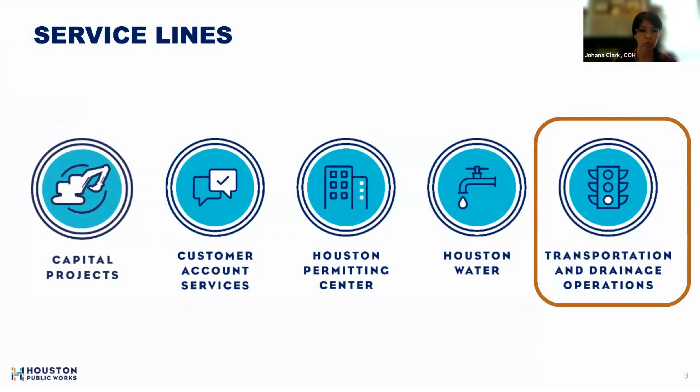Please place your questions in the chat. We are part of a stormwater operations branch. Our team is tasked with delivering drainage rehabilitation programs for the city. We also review all the engineering and design plans that go through the city for CIP, any type of feedback that our Office of City Engineers requires for encroachments or any type of private development impacting drainage infrastructure.

We also have a very good GIS and asset management team that is tasked with keeping our drainage assets properly tracked and mapped. And we also plan for the future drainage in the city of Houston and coordinate with our capital projects team to make those happen. Our largest group is maintenance—we maintain and operate the existing massive drainage infrastructure in the city.

So with that, our local drainage program is one of the programs we have to rehabilitate the infrastructure that we have today in the city. We deliver rehabilitation, but also very comprehensive street and drainage projects for various neighborhoods throughout the city. This is where we started looking at green infrastructure. So let's talk about the why.

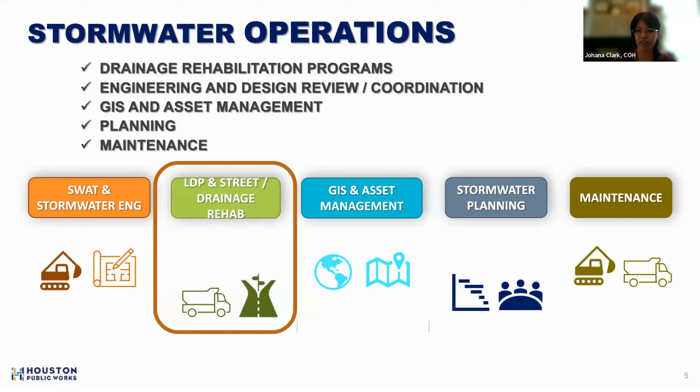Many cities are already ahead of Houston for various reasons. They have been investing in green infrastructure as part of integrated management solutions for stormwater, not only to help with stormwater quality, but to also help with stormwater runoff mitigation.

The green approach can give us a lot of environmental and social benefits too, that through traditional gray infrastructure methods we cannot achieve. So overall, the performance of green infrastructure allows us to reduce pollutant discharge into receiving waterways. We remove a lot of air and water pollutants, and also control stormwater runoff, which helps our flood mitigation strategy. And all of this is why we're looking at it.

This is perfectly aligned with what Resilient Houston is about. I hope all of you are familiar with the plan that was released back in 2020 by Mayor Turner. It's a framework to transform our city to be sure that it's sustainable and resilient, and approaches such as green infrastructure are key and very critical to achieve these goals.

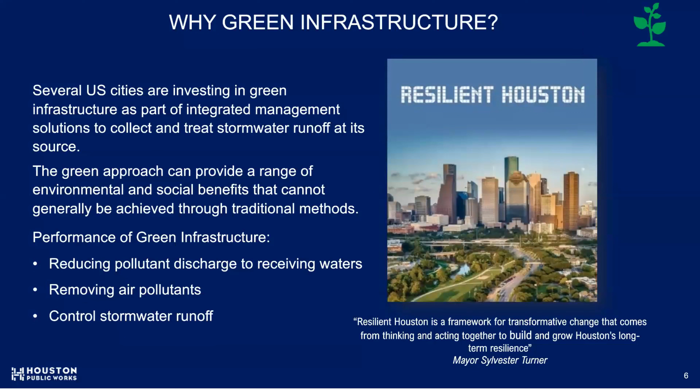Going back to Resilient Houston, this framework has 18 main goals that need to be achieved if we want to get to the 2050 carbon neutral objective laid out by this plan. One of them, goal 11, is to complete 100 new green infrastructure projects by 2025. So that's why Houston Public Works has taken the lead on piloting a set of projects as part of our rehabilitation efforts throughout the city.

So we will have green infrastructure incorporated in many CIPs moving forward. However, we wanted to go ahead of the game and start implementing them and learning what green infrastructure techniques are suitable for the city, which ones will be built right away and maintained mainly by Public Works or any other department, which ones are suitable for us to take over, and of course, efficiency. So that's the goal of this presentation - we want to share with you some of those initiatives.

As benefits of green infrastructure, we can list these primary ones: we can manage stormwater runoff, we can provide retention - we can hold on to this stormwater for some time before it gets rapidly released into our waterways or standard drainage methods, as we do when we don't have this type of application. We reduce street ponding, we can minimize the construction footprint typically seen in our projects, and we can promote groundwater recharge, and contaminant removal is a big thing.

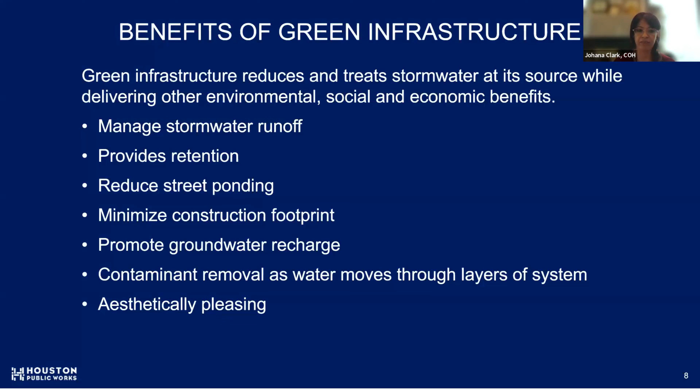We do have challenges - again, those are the reasons why we started with these piloting projects that we're going to share with you today. We are seeing obviously higher costs than traditional infrastructure, mainly because we are not yet seeing a massive deployment of these applications in Houston. We hope that's going to change in the next few years.

We have seen limited flexibility to make field changes, longer lead times due to limited suppliers - again, all of this related to the pilot projects we've been working on in the last few months - and also limited certified installers within the city. Most applications require recurring maintenance, like some of our traditional methods, but the maintenance for green infrastructure is very different from what we have today related to inspection, cleaning of storm sewer pipes, or maintaining roadside ditches, detention ponds, and stormwater pump stations. Green infrastructure is very different and requires us to train our maintenance teams.

And we don't necessarily have performance and maintenance data collected directly by the city. We know that many entities like Harris County, HGAC, and others have collected a lot of data and published very good guidelines, but we wanted to be sure that as part of the City of Houston, specifically Public Works, we are doing our diligence and collecting our own data to see the effectiveness and how suitable those practices are.

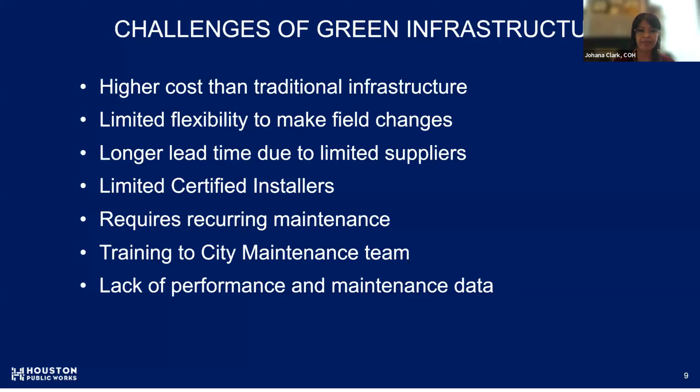So with that, I want to pass this on to Lagnesh Varshney, who will be sharing with you the specific applications we chose for our pilot projects and how we conducted, performed, and evaluated these applications.

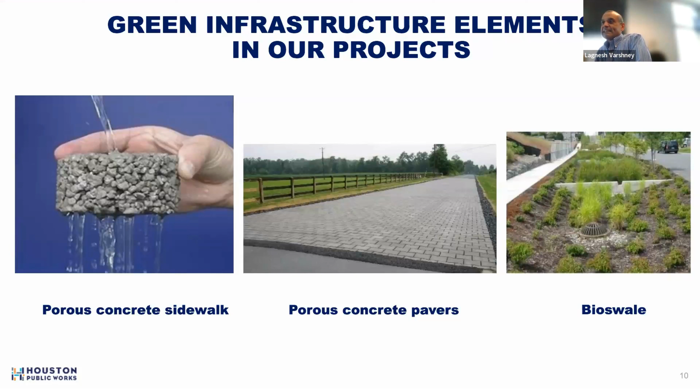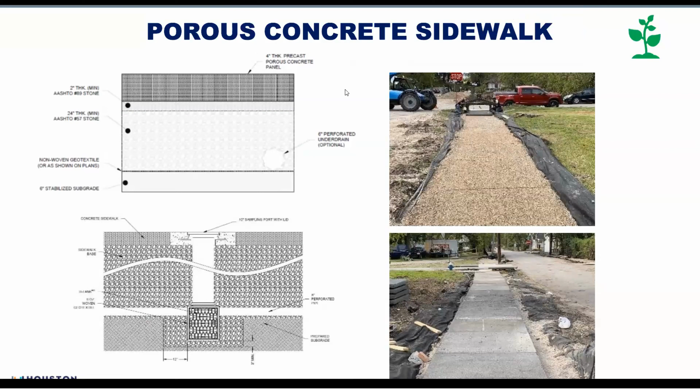This is the porous concrete sidewalk, which has almost 2 feet of filter media under the sidewalk. Then there is a small 6-inch perforated pipe, which collects all the stormwater and ultimately drains to the system - either an open ditch system or a closed system. Another one is the sampling port, and I'll tell more about that, which we are doing on every project so that samples can be collected for stormwater quality.

On the right side is the Malone Park sidewalk. You can see how we were working on the preparation - all those loose gravel, filter media - and then finally we put the panel on top of it.

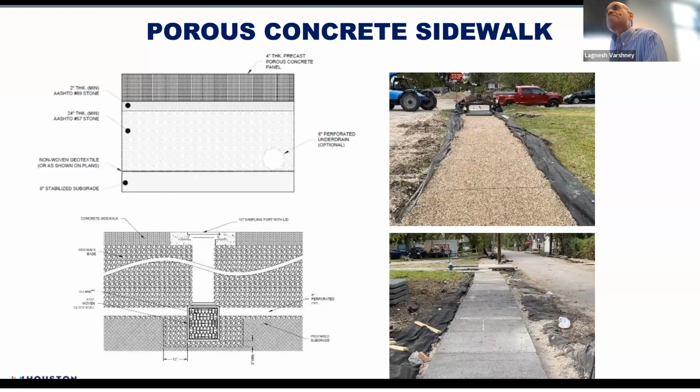These are the porous pavers, which we did on the Winter Street project. Why did we choose porous paver in this location? Because this is a less traffic area - it has only one driveway access to the property next to the railroad. We did this project last year, started and finished in May, and I'm going to show you some of the performance in our next slide.

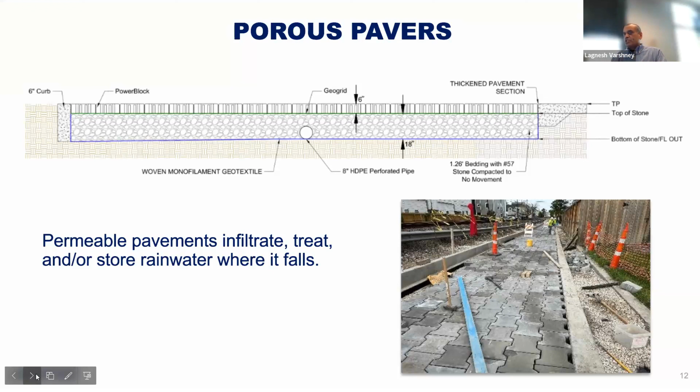Again, it's the same thing - blocks, interblocks. Then there's a filter media at the bottom, 2 feet, and then there's an 8-inch perforated pipe in the middle, which can collect all the water and ultimately drains to the closed system, the open system, or the ditch system.

BioSwale is our 3rd item, which we will be using on the Windsor Park project, where we are making a connection between Windsor Park and Mayor Sylvester Turner Park in Acres Homes, where we will use some of the porous sidewalk and BioSwale. This is the 3rd item, which we haven't started yet, but we have released for construction. I can share more detail once we finish that project for BioSwale.

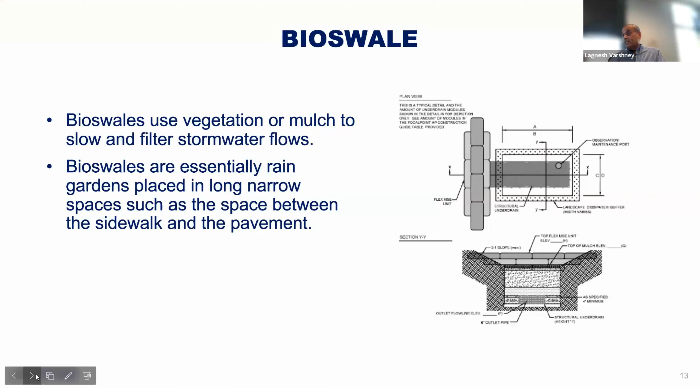So cost comparison - as Johana mentioned, it's quite pricey. When we started, we ended up paying more because, first of all, limited supplier, limited delivery, not much competition, small quantities, so we ended up paying a little more to begin with for the sidewalk. Then we had a second project, Winter Street project, when we had a sidewalk and porous pavers - we negotiated almost 30 to 40% down.

And then our 3rd project, Windsor Park, where we have almost $1 million of concrete porous sidewalk, we negotiated even more. So as we deliver more projects and our demands increase, we are going to get better negotiated costs from these suppliers. And when they find out that the city is looking for those options, more suppliers and installers will come in, and we will have better competition.

As Johana mentioned in her presentation, by 2025 the city is committed to deliver 100 green infrastructure projects, and these are the first 3 from Houston Public Works. I know there are other entities also involved. When they see there's a lot of demand, we will have better competition and better price comparison. The benefits from these green infrastructure elements we will be quantifying in the future, maybe after 2 years, and then we can do some cost-benefit analysis on what kind of benefits we are getting after investing so much money in completing these projects.

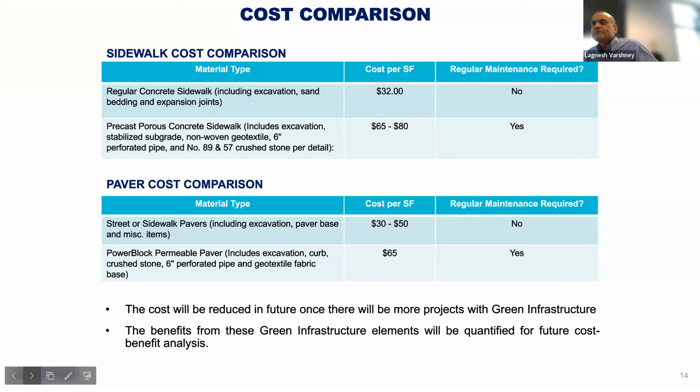As I mentioned, we have Malone Park and Winter Street completed. Malone Park has a porous sidewalk all around the park. Winter Street has a sidewalk and porous pavers. If you look at the volume of detention - in Malone Park we have almost 100,000 gallons of water, which someone suggested we compare with a Starbucks coffee cup: 816,000 coffee cups, or 1 million 12-ounce Coke cans. Same with Winter Street - look at the volume we will have after any rain event.

I would rather have water in those voids rather than going to the property or creating some gutter ponding or some kind of drainage issue, not flooding exactly. So these green infrastructure elements are providing temporary storage of stormwater.

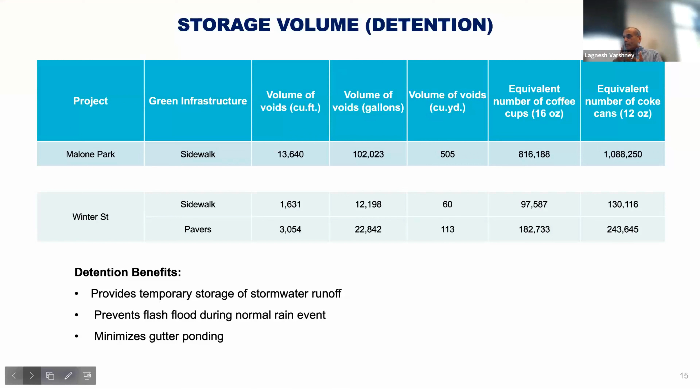It can prevent flash flooding if there's a normal rain event, and of course it minimizes gutter ponding. The way I look at it, with this volume we're not needing any detention pond, and we all know the cost of a detention pond: maintenance, getting the land, all those features attached to it. It's quite pricey. That's what we'll be doing, a cost benefit analysis after a couple of years once we have more data and information regarding its performance.

Next slide please. So as I mentioned, these are the projects with green infrastructure. Next slide please, Malone Park.

This is the location right near University of Houston, almost $1.5 million. These red lines show we have sidewalk on both sides, and we did improve the streets because this was covered under street and drainage rehab. The project was done. We have this green infrastructure sign specially made for us, and we came up with new signs from our maintenance facility which we'll have at these locations talking about green infrastructure. So this project is complete.

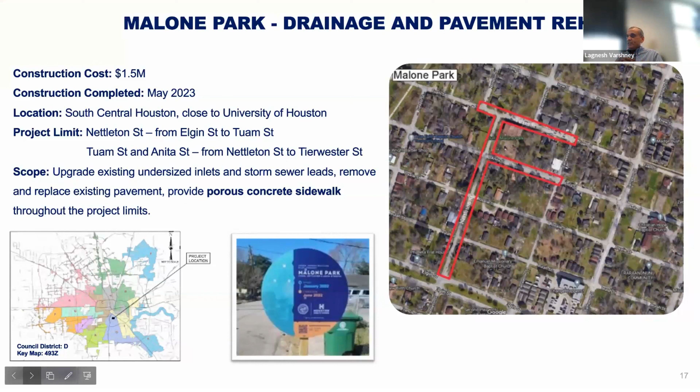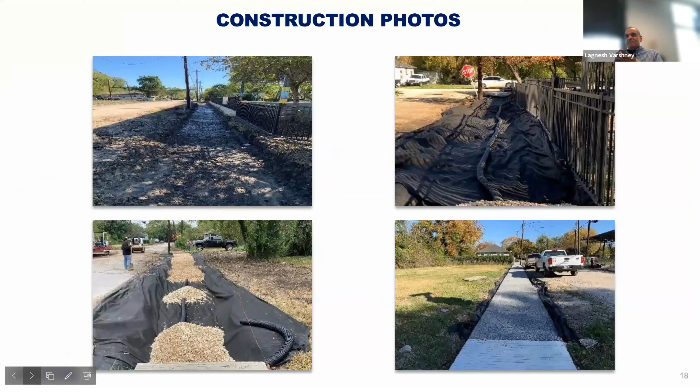These are some construction photos. I just want to share how it was, how it is. These are before and after, how it was, how it is now. You can see the sidewalk on both sides, brand new sidewalk.

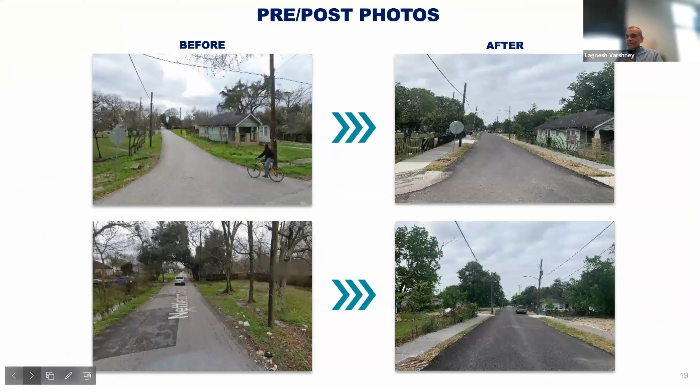Next slide please. This is Winter Street, where we had Winter Street and Hickory. On Winter, we put porous paver. On Hickory, we put porous sidewalk on both sides, and our sidewalk goes through the driveways because these are traffic rated, so people can drive and park their car in their garages. That project is also complete as of May.

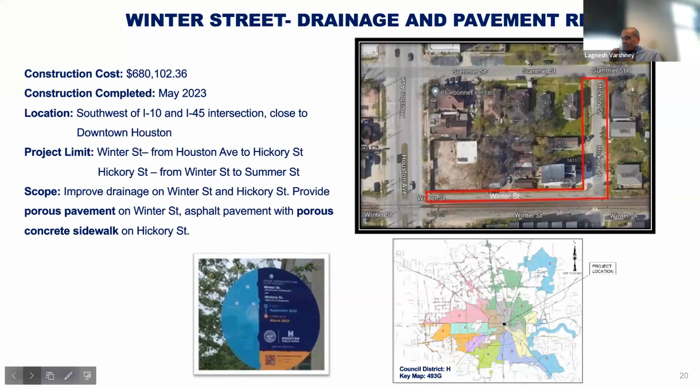Next slide, I'm going to show you how these porous pavers are working. These are some of the during-construction photos, how we were doing it, and you can see the 8-inch perforated pipe on the top left, the person working on it. These are some of the panels, very heavy panels. It's very difficult to make field changes on those panels, so we have to be exact in measuring those.

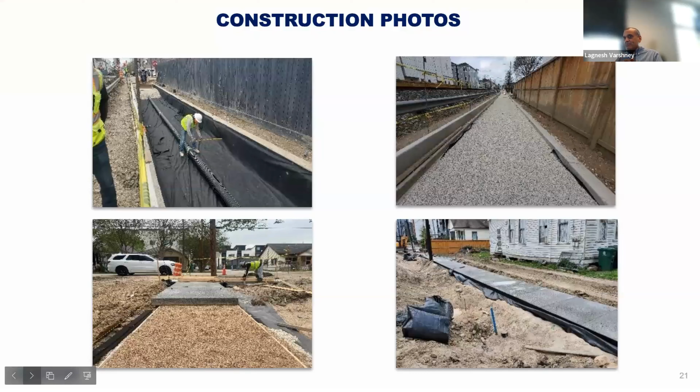Next slide please. These are some before and after. Look how good, as we mentioned, aesthetically pleasing. The porous paver after looks very nice, very close to downtown. Please go by and check it out.

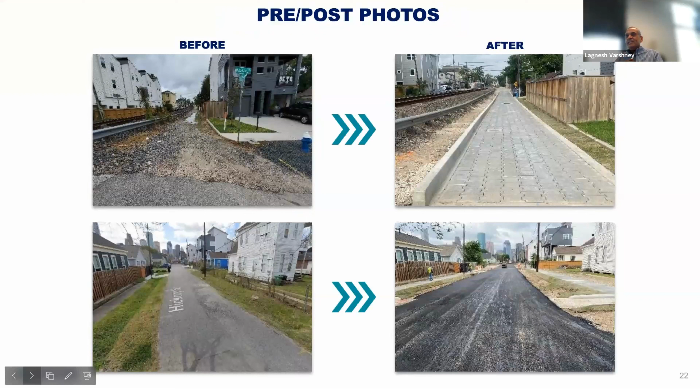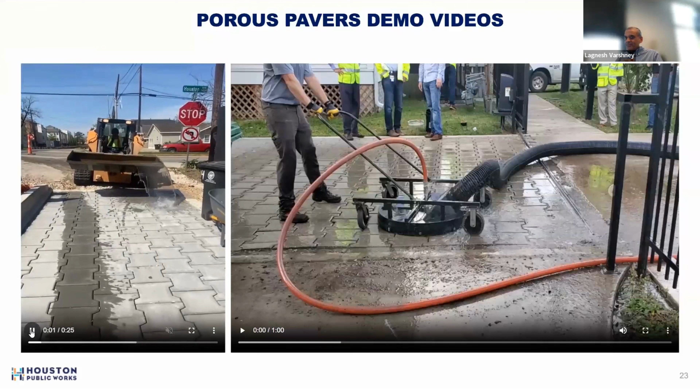Okay, would you please play the video and see how the water goes? You need to start from zero, back it up. Now you guys can see we are pouring water during construction, and the water is gone. It's going all to the storage, to the 2-foot filter media.

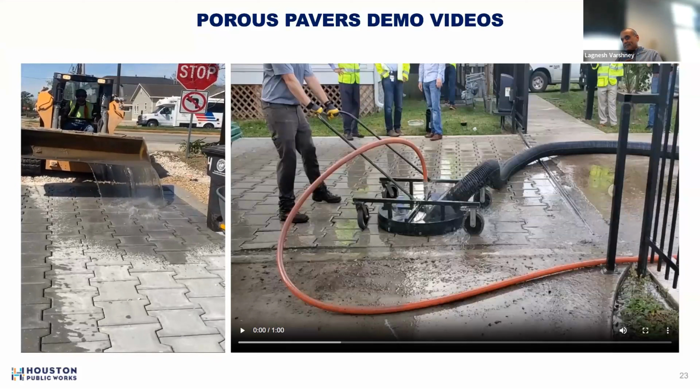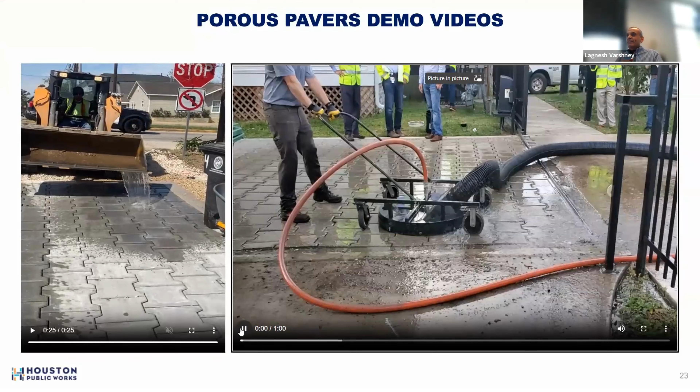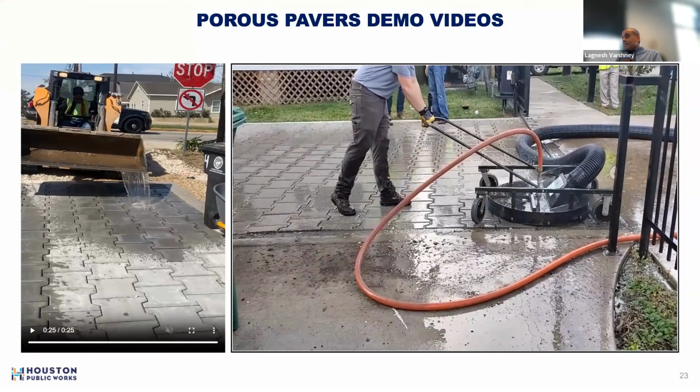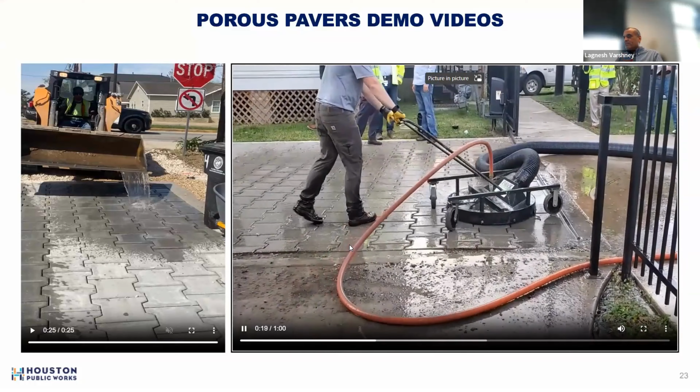The next video shows how to clean it. This is the way we clean it: it's a pressure wash, and the black hose kind of sucks through the pores. We need that every 3 months, and we need deep cleaning once a year. So maintenance is kind of a challenge, but nothing is impossible in Houston Public Works. We'll make it happen. We are gearing up with equipment, gearing up with manpower, and we're providing training. Our street and drainage, Mr. Fabio Capio, is leading his team, and we're working with them to come up with a game plan to do continuous maintenance.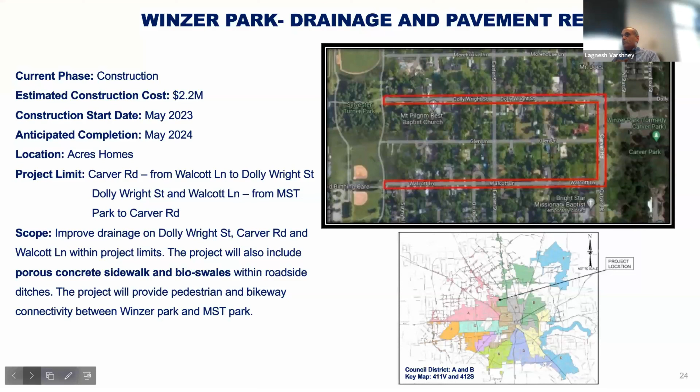Almost $2.2 million. Out of 2.2, $1 million we are spending on porous sidewalk - a negotiated price. It would have been 1.5 million, but we negotiated pretty good because we are using more. Next slide please.

So here's the good news. USGS approached us - hey, what can we do to help you with sampling? I said, hey, it's free, let's come on in. So we came up with a right-of-way agreement for those locations and installed sampling points on those projects. They'll be starting stormwater quality sampling to check the quality, and they'll share that data with us after they do that. We just executed the agreement in July.

So for the next 18 months, they will be checking our Winter Street project and eventually the Winzer Park project. Those two locations will be sampled by them on a periodic basis, especially before the rain event and after the rain event, to check the quality before it goes through the system. There will be a lot of parameters which we will find out, and we would be happy to share with this group again in the future.

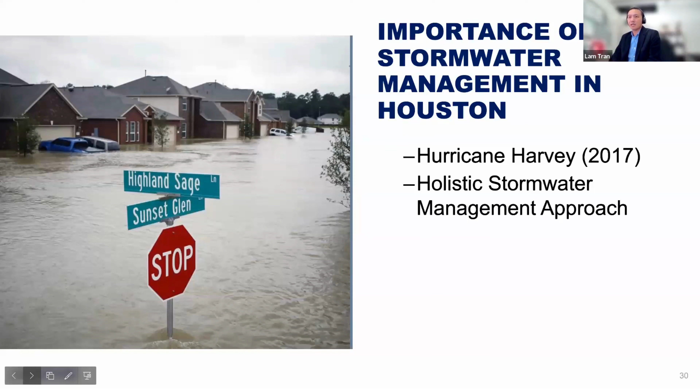So why is it important for stormwater management in Houston? Particularly, we all experienced Hurricane Harvey in 2017, and so we have to develop... after Harvey, the city had to develop additional stormwater management tools to have a holistic stormwater management approach. So the goal is to encourage designers and developers to utilize every stormwater management tool that's available, but particularly these LID techniques that I'm going to go into detail next.

So before I get into some of the tools available for designers, I want to talk about background, the city compared to other cities. So some factors about Houston: we receive a large amount of rain, about 50 inches on average total, and our topography is around 50 to 100 feet. It may be a little higher on the outskirts of Houston, but the geology is clay, primarily clay and silt, which is the Beaumont clay that's around here.

Comparing that with Austin and Dallas, the rainfall is less, and the topography varies much more in elevation—we're talking about hundreds of feet. The geology is very different. For example, Austin has more porous limestone, clay, karst, which includes caverns, and Dallas is kind of a mixture of Austin and Houston. But both Austin and Dallas, their conditions are much different than ours.

Basically, we're so flat, and the clay beneath us doesn't drain well. So basically, we get rainfall, and since it's so flat and very clayey, we have these challenges. These are very, very difficult challenges given this geography. So what are the available tools to overcome these challenges? Next slide.

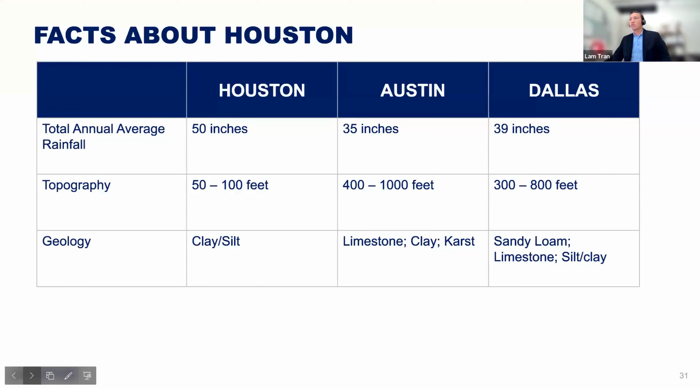I want to dive in a little bit more with pictures to go through these tools. Next slide.

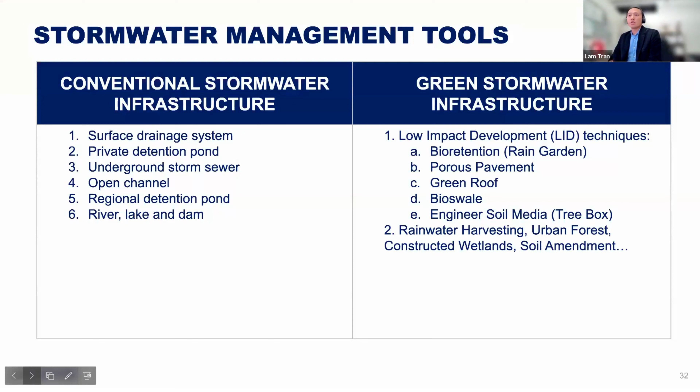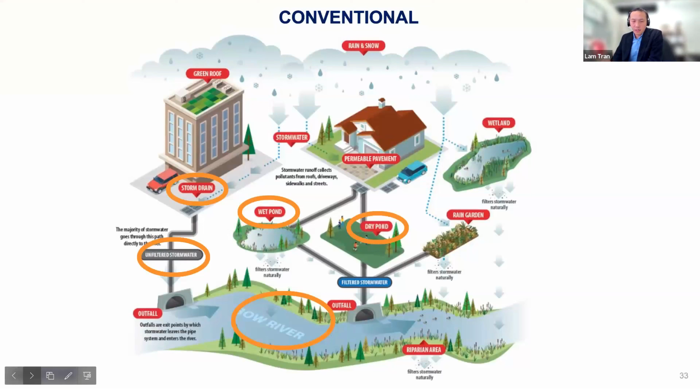This represents the city. For the conventional tools, you'd have surface runoff going to the storm drain, and then it carries to the underground storm sewer. Sometimes it goes to a wet pond or dry pond before getting discharged into lakes and rivers. Next slide.

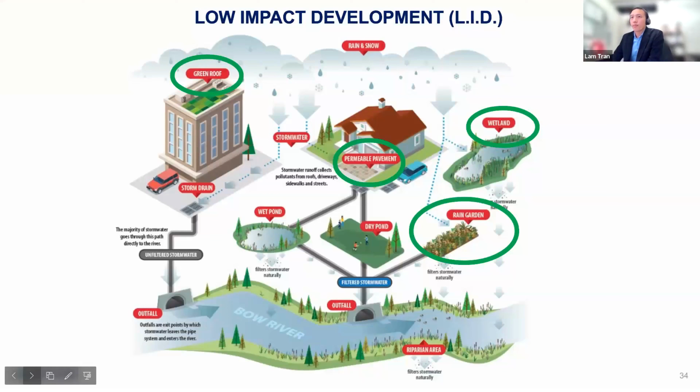Next. So we can dive a little deeper into LID.

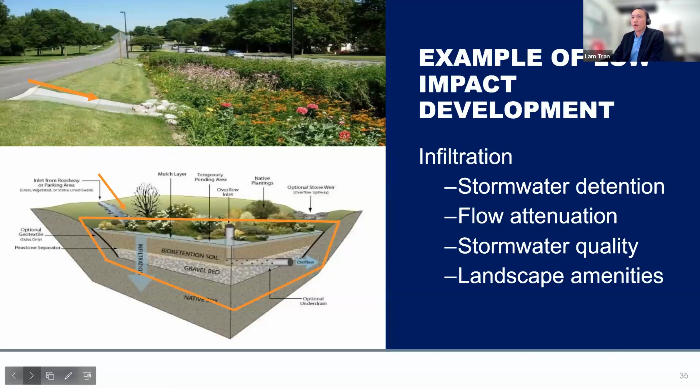Okay, on to the next part. I think a lot of you in private development are probably curious -- because we're encouraging you to do LID, but what is the incentive for private development to get on board with this initiative? Like I said at the very beginning, we're revising Chapter 9 on stormwater, and the two main incentives we're looking into are to provide expedited plan review -- potentially on both the right-of-way and building code side for the permitting process -- and also detention reduction. Everyone in private development knows that April 2021 is when the detention rate changed.

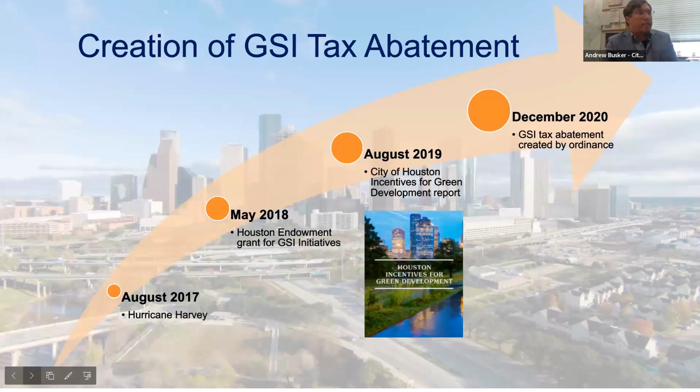So there are several eligibility requirements for a company or developer to qualify for this abatement. I'm going to talk about authorized facilities in a moment, but the total project cost for the entire thing has to be at least $3 million, including development and non-development costs. That's a fairly small threshold. The GSI investment in all forms, if you can make a case that it's part of the GSI investment, we'll consider it, and it has to be at least $100,000.

One challenge we see is that the project construction has not started yet, and that's something we could negotiate on what 'construction has not started yet' means. But really the key point I think you'll be interested in is the very bottom bullet.

The GSI design needs to meet Chapter 9, which Lam just said is being updated, and also Chapter 33 of our Code of Ordinances, which covers planning and development. There are descriptions of what urban forestry and native ecosystem restoration looks like, and I'll go into that stuff in a second.

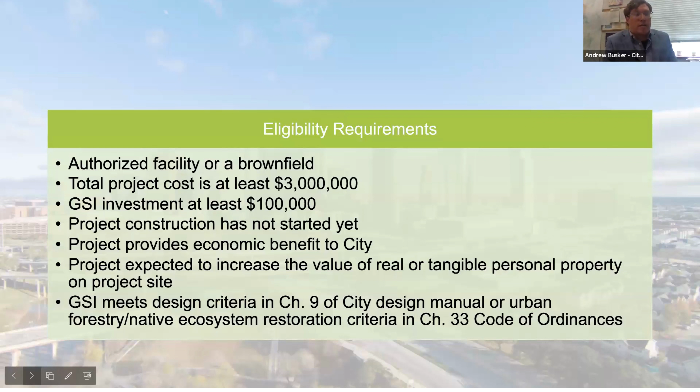Next slide, please. When we're looking at an authorized facility, this comes from another piece of our tax abatement ordinances. It's really any property or facility that can be used for some sort of commercial purpose, and we have a ton of different examples here, anywhere from manufacturing to multifamily residential, retail strip centers, things like that.

Next slide. Now we're looking at the different eligible GSI methods. This is where the tax abatement is a little misleading by its name, because it can qualify for anything remotely related to GSI, not just bioswales or something. So if you have a building and want to put in a community garden for a multifamily development, that can qualify for this abatement. If you're putting in street trees along a road design and want to do something more impactful than the traditional streetscape, that could potentially qualify too.

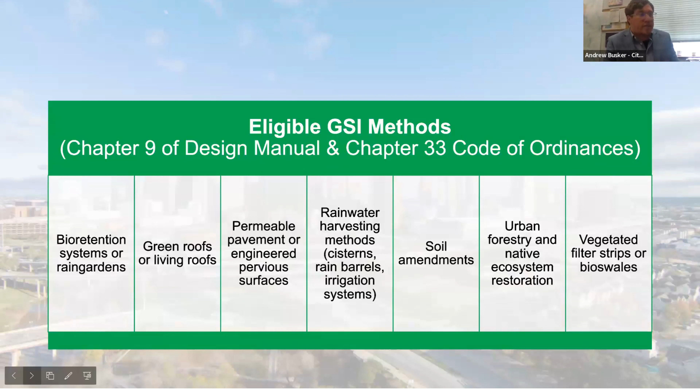Next slide, please. So here we're going into a little more detail on the requirements of the tax abatement program. Once the project is eligible, we're also considering these factors: how much it will reduce flooding and the heat island effect, and improve water quality. We're also looking at how the project aligns with what the permitting center has to approve, and we really want these projects to be showcases in our community.

So we do require that whatever GSI project receives an abatement has to be open, either for public works or the company, to show off and provide trainings or some sort of way for us to showcase it.

When we look at the money side of things, by state statute, no tax abatement can be longer than 10 years. But what's unique about this abatement is that we can abate 100% of the increase in property value for this property, and that amount would transfer back into whatever your GSI project costs are. I'll go through some examples in a second here, because it can be a little funky.

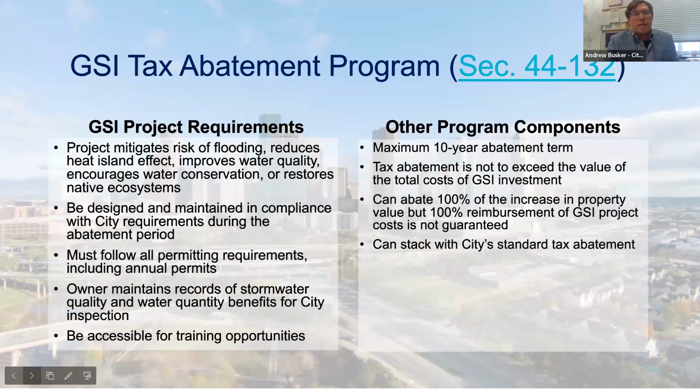So here's our first example. If we're taking just the most fundamental, basic pieces of the requirements based on the statute: project cost is $3 million, $100,000 of GSI costs. The project will qualify for 100% abatement of the city's portion of property taxes.

When we plop that into a tax abatement, we're looking at a potential reimbursement of about $16,000 year over year, and that's assuming there's no growth in property value. So for this example, their $100,000 in GSI costs would definitely be reimbursed within the 10 years.

Next slide. Looking at a more real world example, we've got a building that already has a taxable value of about $3 million. They're putting in a bunch of investment, and the total project is going to be about $15 million. Of that $15 million, we're looking at about $1 million of GSI project costs. When we plop that into an abatement, that could look at potentially

$64,000 from that first year of abatement, and that could go up. In this example, we're assuming no growth in property value, but we all know that property value usually increases over time. So in this example, the developer may not be fully reimbursed for the full $1 million, but if

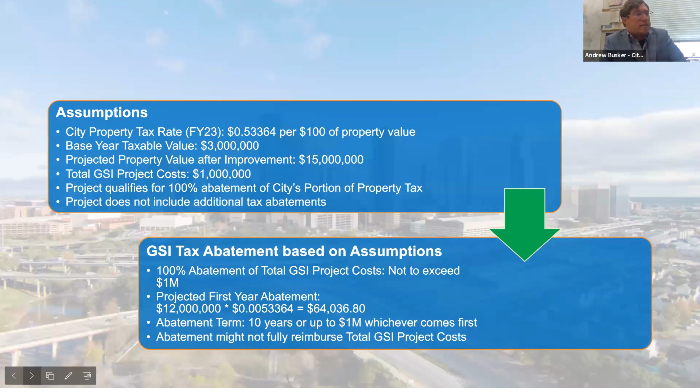we're assuming an increase in property value, they very well could be fully reimbursed. All right, next slide. So all tax abatements have to go through this process, regardless of what type of tax abatement it is. It starts off with having a conversation with me, and we'll walk through what you need to do and go through the application together. Once that application is formally submitted, our office reviews it and determines whether or not we're going to recommend the tax abatement for city council review. During that process, we'll have a public hearing and that sort of stuff. Once city council approves the abatement, you'll then go into monitoring every year, with an annual report that you'd have to provide for us. So that's the overview of the general process.

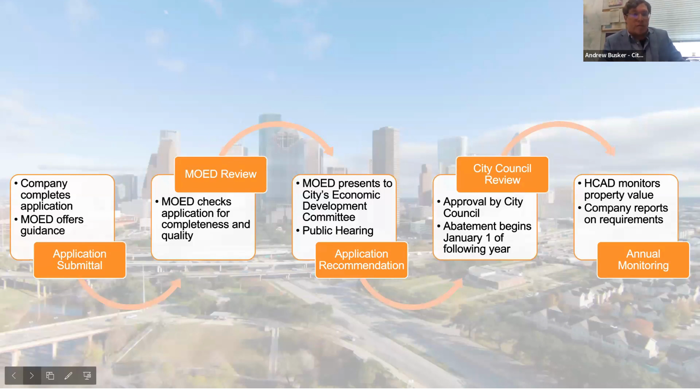There are some things that are specific for the GSI abatement. Next slide. The Green Stormwater Infrastructure tax abatement has its own separate application compared to our other traditional tax abatement forms. What we're requiring with this abatement is we'll need to see what your designs are. The tax abatement also covers 2 years of maintenance, which you can include in your GSI project costs.

We're also looking at you to be hand in hand with the permitting center here. What we're trying to do is see what that cost gap is between putting in your traditional gray infrastructure versus your GSI infrastructure. And then, well, we all understand the benefits of GSI, but what does that look like for this specific project? Since all of this is based on the Resilient Houston plan, we also look at how this project benefits the city through Resilient Houston. Next slide.

So this one, similarly, is what our office is going to look at when we're evaluating an abatement. All of these could apply to varying degrees depending on the nature of the project. The big things here are: where is the project, and then what type of GSI are you doing and to what scale?

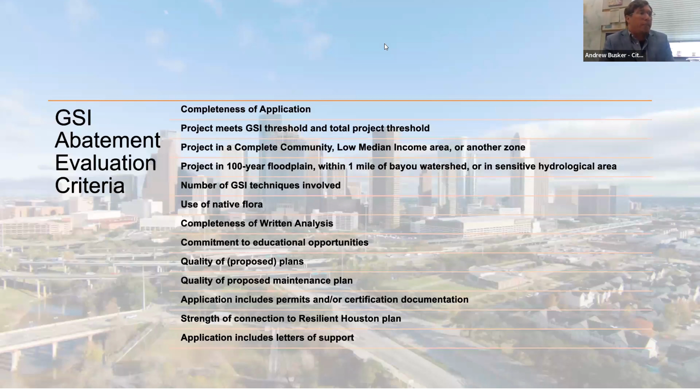This is also one that can stack with our traditional economic development abatement. So you could have, if you're going all out with low impact development, an office building that is LEED certified plus utilizes GSI, and the other components like machinery and equipment or business personal property can also qualify for the traditional tax abatement. So you could have all three stacked together at the same time.

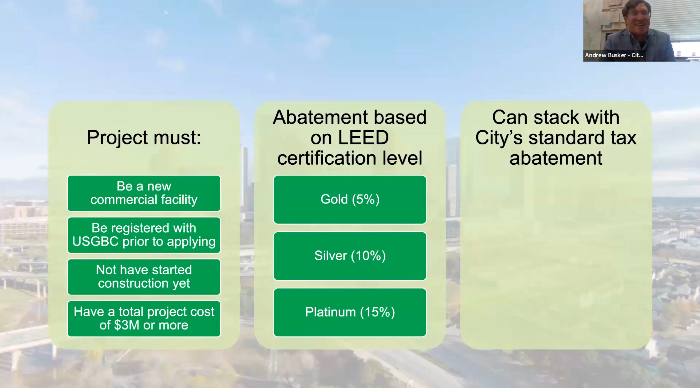So that is a very fast version of what I'm offering here at the mayor's office. The next slide has my contact information, and you're welcome to email me or give me a call if you have any questions.

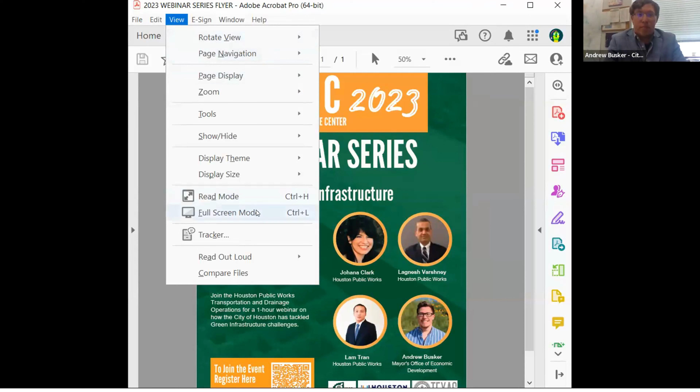Yeah, that's an excellent question. So with our office, we're looking at property that's taxable. With a nonprofit not being taxable, the tax abatement options cut off, but it might be worth maybe looking at the Houston Galveston Area Council, or whatever your regional planning commission makeup looks like, because they might have some sort of resiliency grants or other funding mechanism that the nonprofit could utilize. That's my suggestion.

There's a question going back to some that came in early on. Regarding the challenges you're facing, are you looking at policy or regulation that needs to be changed to increase the implementation of GSI? And how does this affect hazard mitigation plans? Are there any developments involving transdisciplinary research to increase the knowledge of how these systems actually function, from a hydrological, but also financial and governmental view?

I can answer that partly. The first question, when LID is being proposed in private development, is the cost benefit, right? Because when using LID to detain water, you don't get a maximum detention volume versus an open detention pond. So we understand from the technical side that there's a benefit to using LID. Based on that, we're developing a policy where, if a certain amount of LID is being used, a certain incentive or reduction of detention rate would potentially be applied, because a lot of people have complained that detention costs a lot of money as part of their private development.